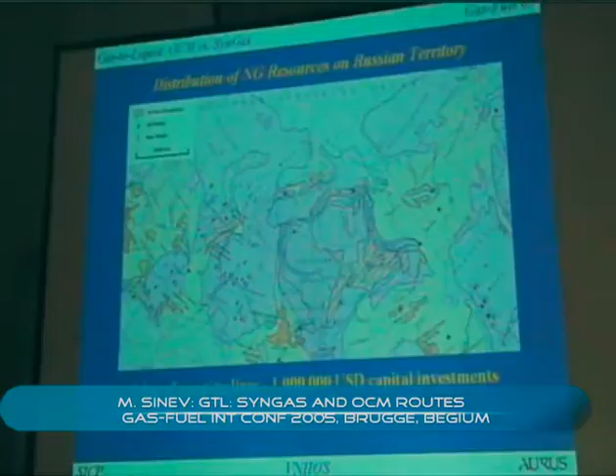These huge territories are gas and oil provinces in Russia. And this is the scale, this is 1,000 kilometers. Here you have a number: in order to build a pipeline of 1,000 kilometers, you have to pay about $1 billion US.

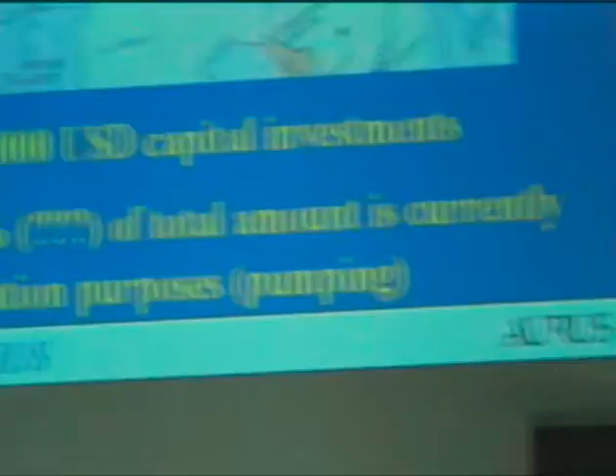It's quite a number. In order to collect gas from such huge territories, you have to build huge pipelines because you need a network. So that means there is one more problem: if we want to transport gas in pipelines, we are now paying about 10% of the whole amount of natural gas taken from the ground just to pump the rest. So this is really a very, very serious problem.

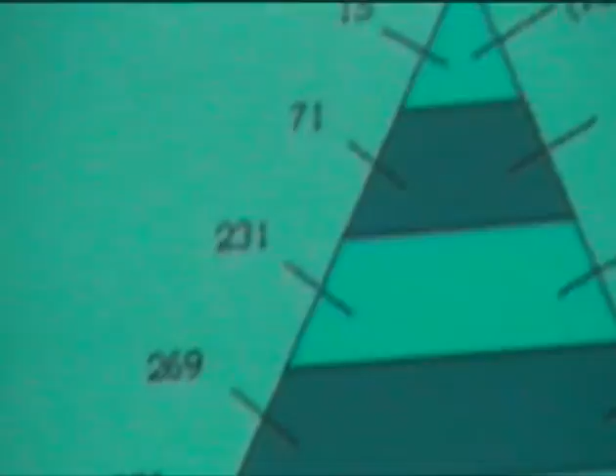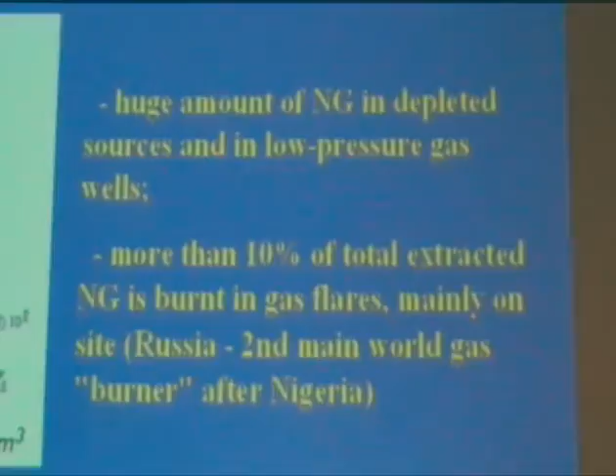There is another problem. If we look at the distribution of natural gas in different gas fields, we will see that only some gas fields contain enough gas to build huge GTL plants of the type we heard about during the last 2 days. But in other gas fields, the amount of gas is not as huge, and in order to build some plants or create technologies able to convert this natural gas into any product we would like, we have to think about different technologies.

But as far as Russia is concerned, we badly need new technologies which can work efficiently at a lower scale of operation.

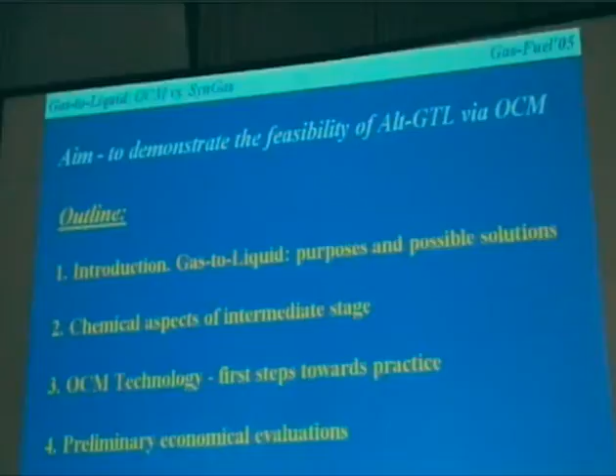The aim of this presentation is to demonstrate the feasibility of alternative GTL technology via oxidative coupling of methane. This is the outline of my talk. I will not stop in detail on the outline, and I will go to the content of the presentation.

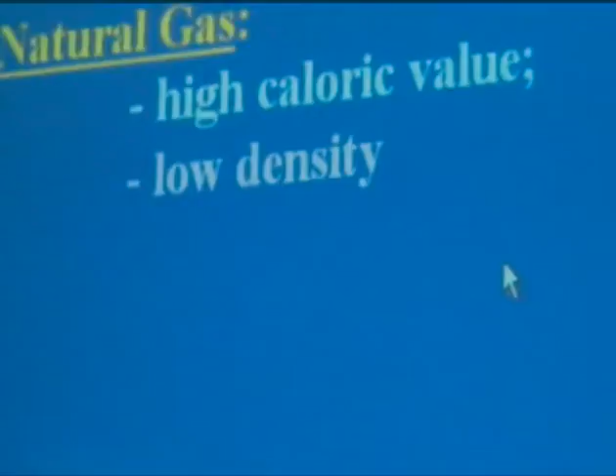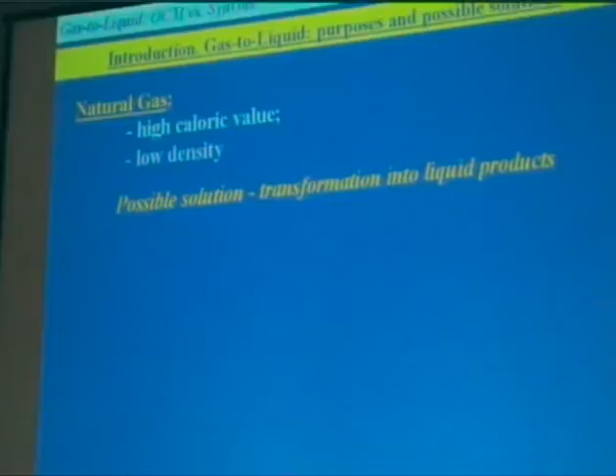Natural gas has high caloric value, but it has a low density. That means we need some ways to make the transportation of the high caloric capacity of natural gas to the final customer, to use it somewhere at a large distance from the place where we take the natural gas from the ground.

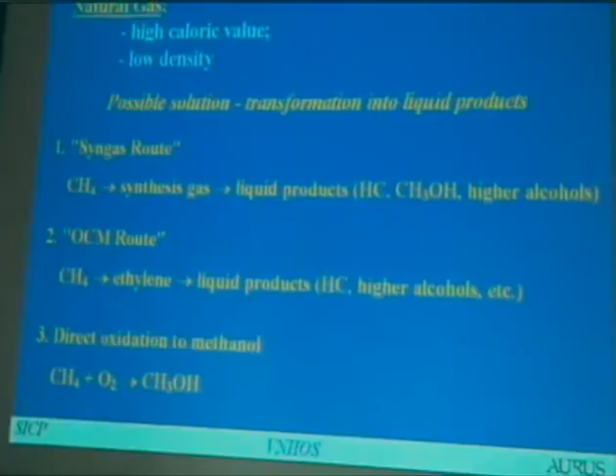Of course, the syngas route is one of the possibilities. Another one is the OCM route, which I will speak about in more detail later. And there is a third route, direct conversion of methane to methanol, which I will not speak about in detail because later this morning Professor Arutyunov from our institute will speak about it in more detail.

So I will focus more on the comparison of the two routes, namely the syngas route and the OCM route. Let me first speak a little about the chemistry of the process. Not just chemistry, but let's speak a little about thermodynamics.

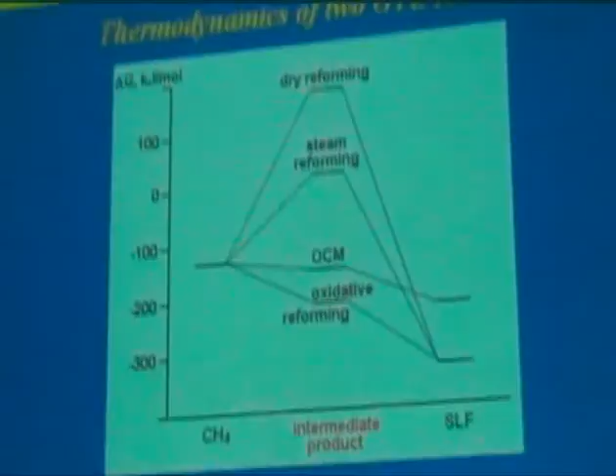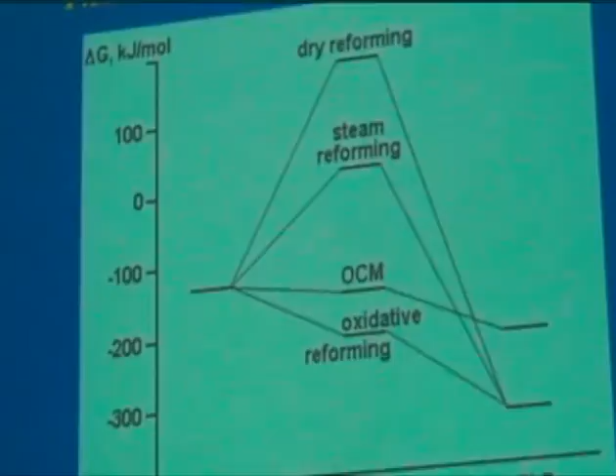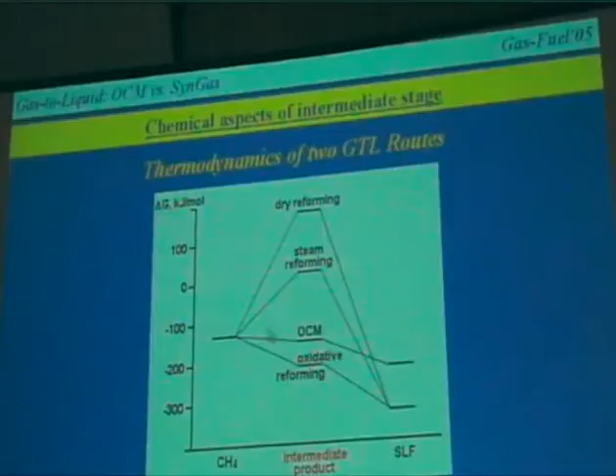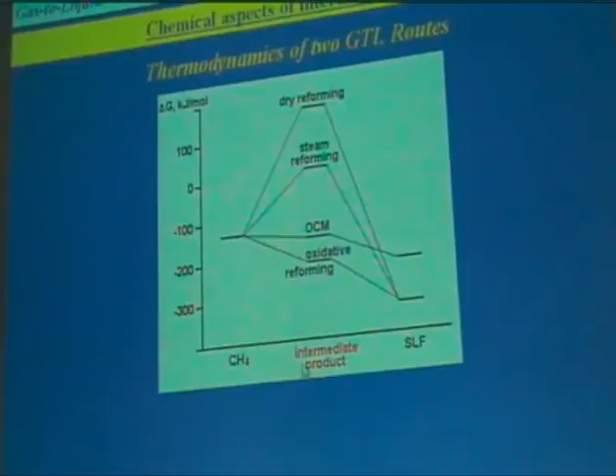If we look at the energetics of the transformation, the free energy of transformation of methane into the final products, in this case synthetic liquid fuels, we will see that if we use reforming with no oxygen, we will have to pass through a very high barrier. The first stage for the production of the intermediate product has a very strong uphill nature.

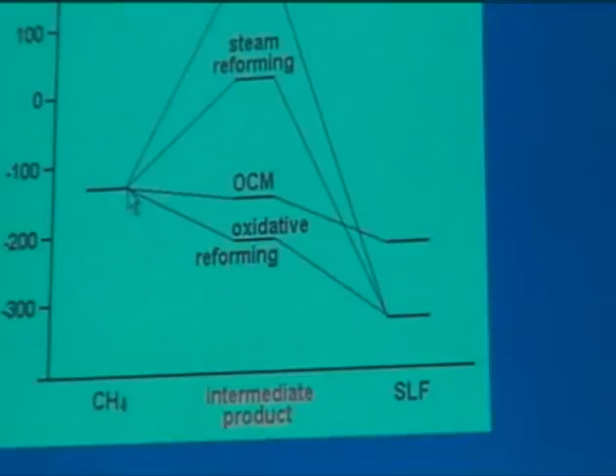But if we go to oxidative routes, for instance oxidative reforming, we go downhill. In the case of oxidative coupling, we have ethylene as an intermediate, and we also go downhill. And the final process, the second stage, is also a downhill process. So we can go smoothly from methane to the final product if we go oxidative.

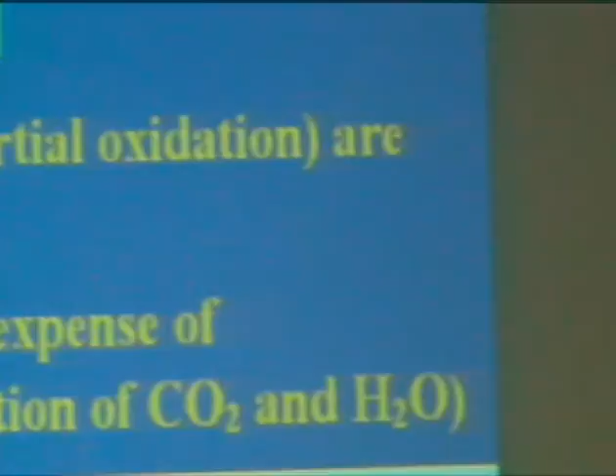So these are the messages from this picture. But also what is important in both cases: if we want to run our processes autothermally, we still have to burn a certain part of the initial natural gas, because neither in the case of oxidative coupling nor oxidative reforming can our catalyst work at the temperatures calculated as adiabatic temperatures in these two cases. So we still need to burn part of the initial natural gas to run these processes autothermally.

That means we will never be able to achieve 100% selectivity on a carbon basis in the case of OCM or oxidative reforming, in terms of carbon and hydrogen efficiency. A little bit about the history.

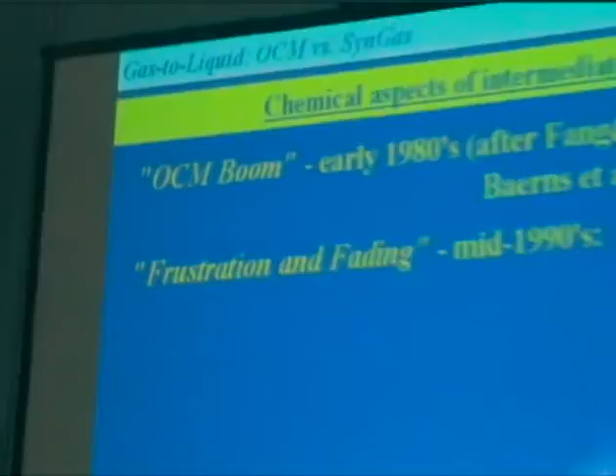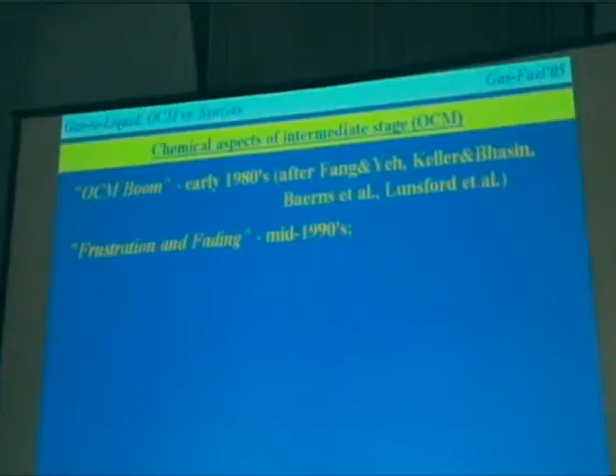Probably many people in this audience remember this oxidative coupling boom, which appeared in the early 80s after the pioneering works of people whose names are now on the screen. But after about 10 or 15 years of development of the area, it went to a state of frustration and fading. And there were certain reasons for that.

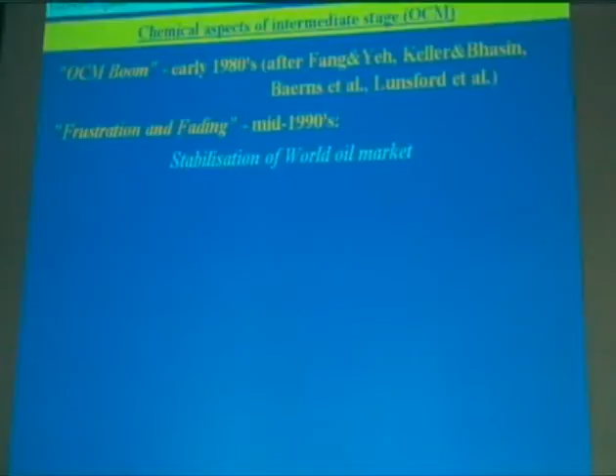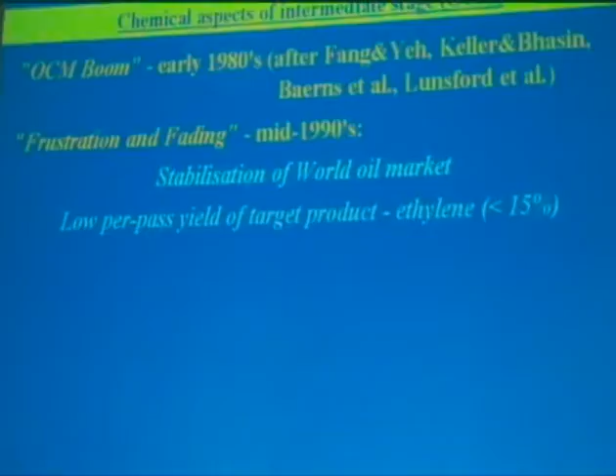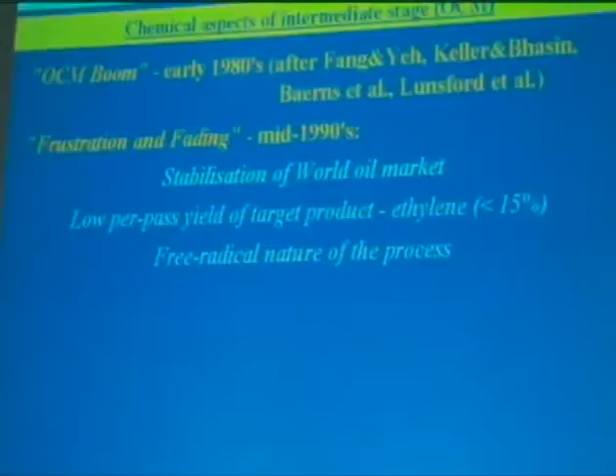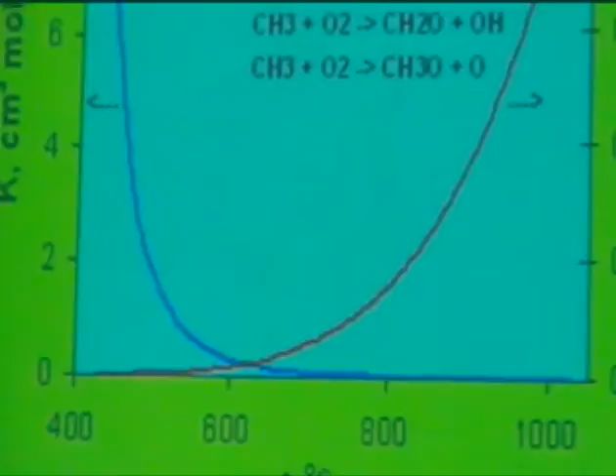First of all, I believe this was due to some stabilization of the world oil market, and relatively low per-pass yield in the oxidative coupling. We cannot achieve more than 15% ethylene per pass because of very strong kinetic limitations, and also because of the free radical nature of the process. Although it's a catalytic process, it has a free radical nature, and it's a very serious problem for scaling up and stable operation because of that free radical nature. But at the same time, it's namely this free radical nature that allows it to take place.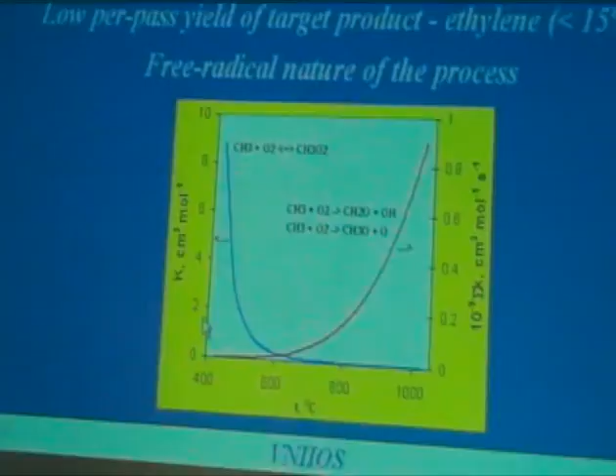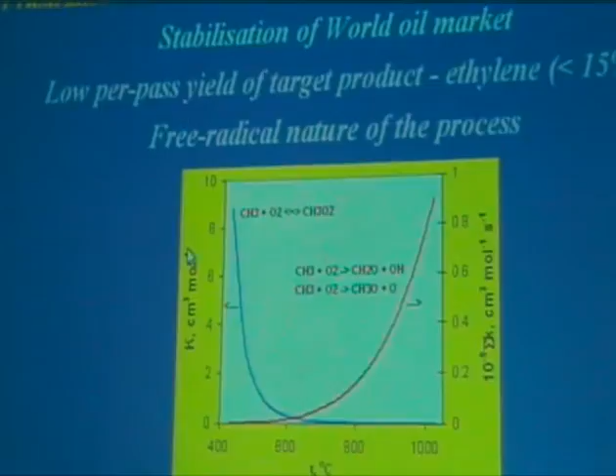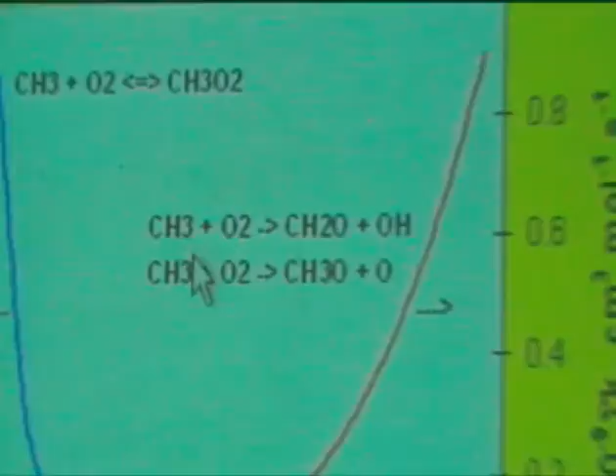If we speak about the microkinetics of the process, we have what I call the OCM window, in the range of temperatures between say 600 and 850. On the left-hand side we have a strong decrease in the value of the equilibrium constant of the methyl reaction with oxygen in the gas. On the other hand, in this temperature interval, the reactions of direct burning of methyl radicals are not important. So in this temperature range, this radical chemistry in the gas phase allows the OCM process to exist.

Now I go a little bit into more technological aspects of the problem. As I told you, there was a boom in oxidative coupling, and in many places in the world, in the United States, in Europe, in Japan, some pilot plants were built, as far as I know. Of course, this is not very open information, but it's known. Now we are trying to give a new life, I would say, to this technology.

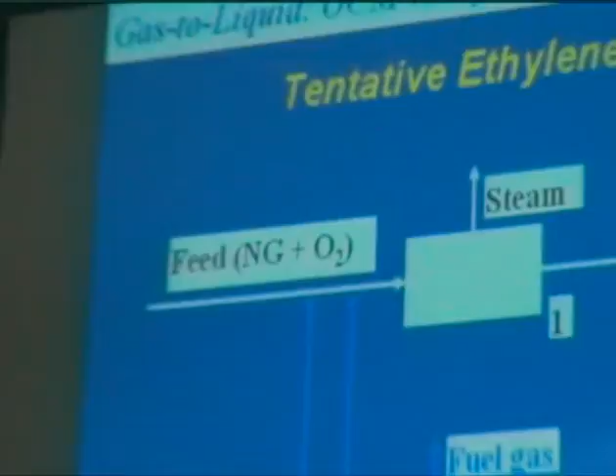On this chart you have an idea of how a tentative ethylene production scheme looks like. This upper part in white is the production of crude ethylene, but this bottom part is what allows us to separate the ethylene from the reaction mixture and bring it to the conditions at which we can use it as a source for polymerization.

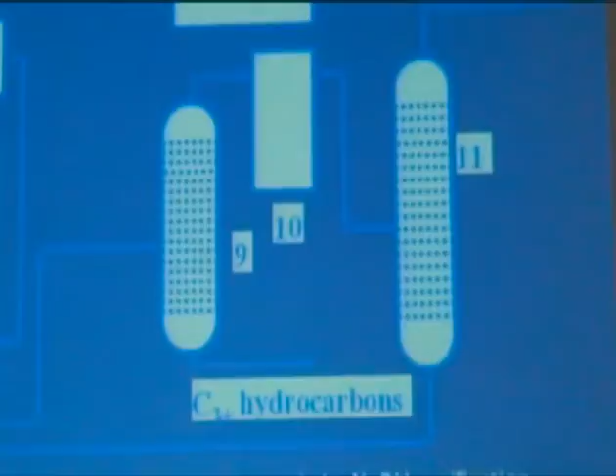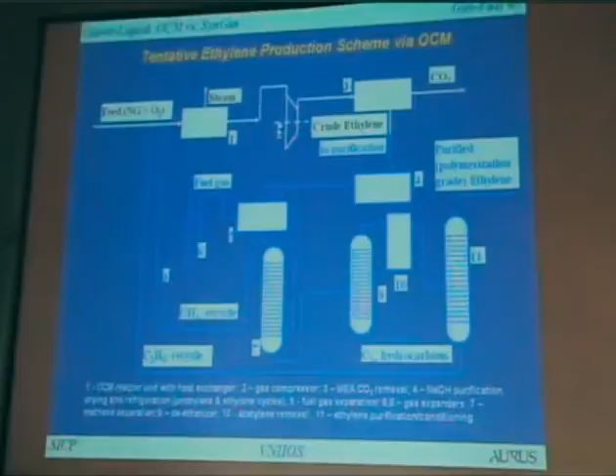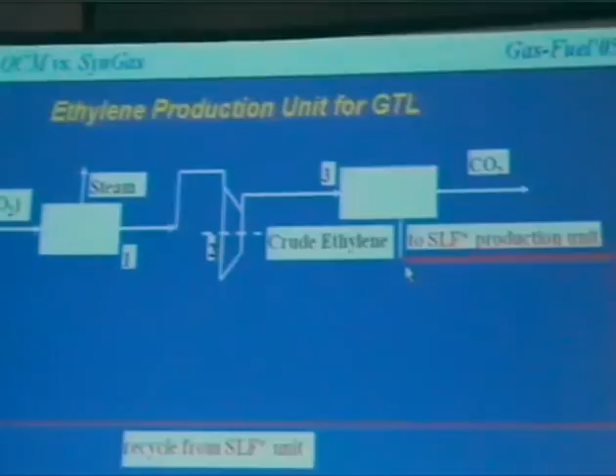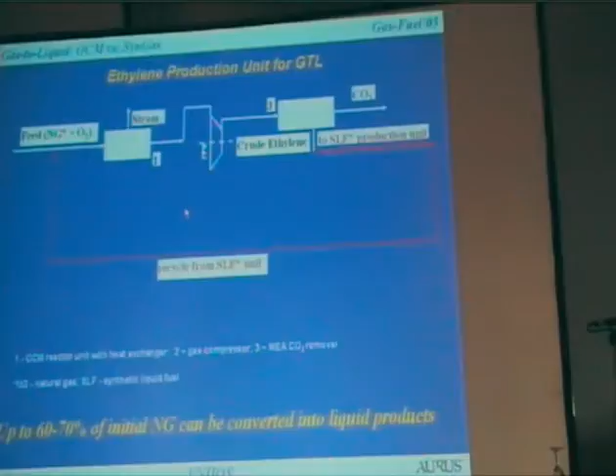Some estimates demonstrate that if we talk about the product for polymerization conditions, we have to pay about 80% of the primary cost for the bottom part of this picture. But if we go to synthetic liquid fuels, we can just forget about that part, and we can produce, in a way similar to the one we saw in the previous presentation, a synthetic fuel very similar to that one, and just recycle the rest of the light hydrocarbons back to the feed. In this case we can convert up to 70%, or at least 60%, of the natural gas coming in into final liquid products.

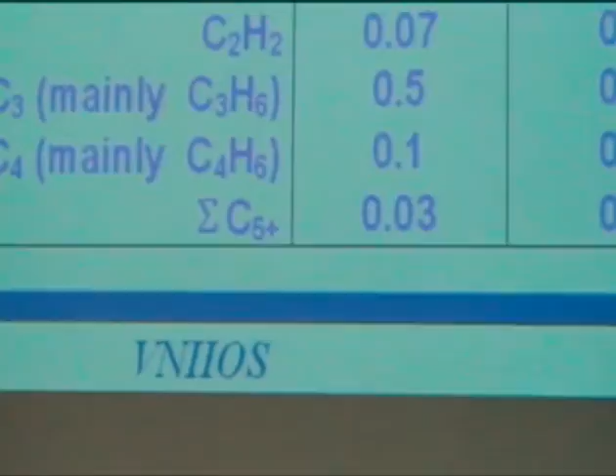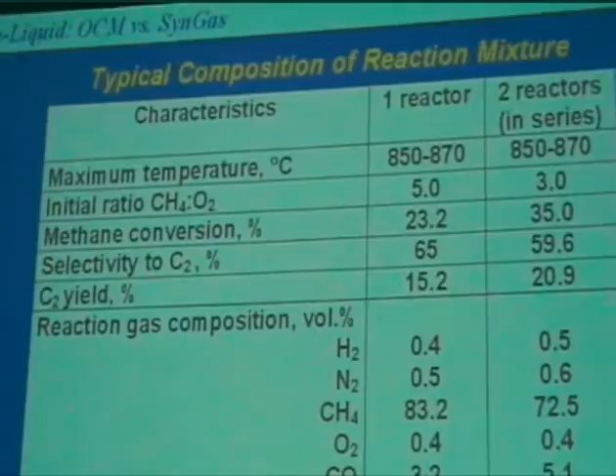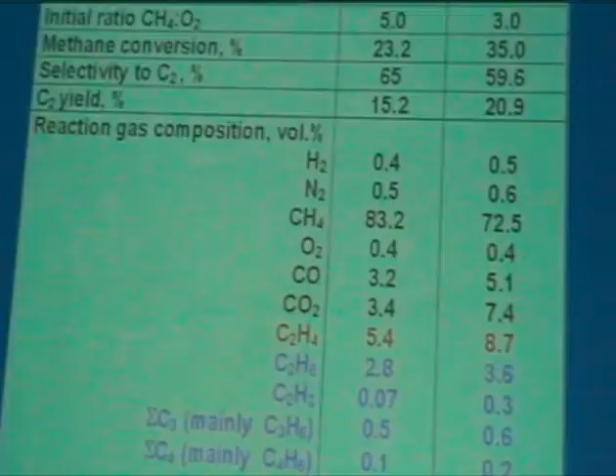This is a typical composition of the reaction mixture which we have in the case of one reactor, or two reactors put in series. We can run, of course, in one reactor with this ratio, but there are two issues. One is safety — of course we don't want to have explosive mixtures in the reactor. The other, which I mentioned before, is that we want to run the reactor autothermally. So if we have a lot of oxygen going into the first reactor, we get overheating, and the process becomes not sustainable and can run away. So we have to reduce the amount of oxygen supplied to the first reactor.

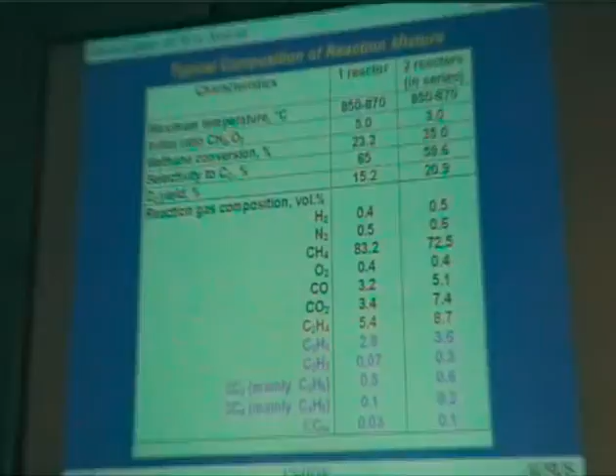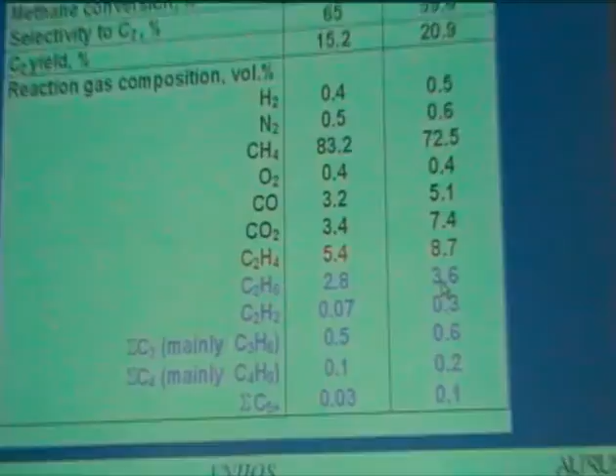But what we don't need to do is separate the mixture after the first reactor. So we can run them in series with no separation of the reaction mixture. We can have up to 8 or even more percent ethylene at the outlet of the reactor, and we have a certain amount of C3 and higher hydrocarbons which can also be utilized.

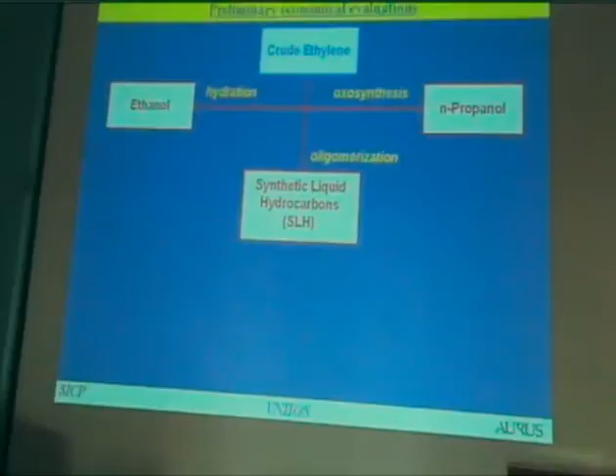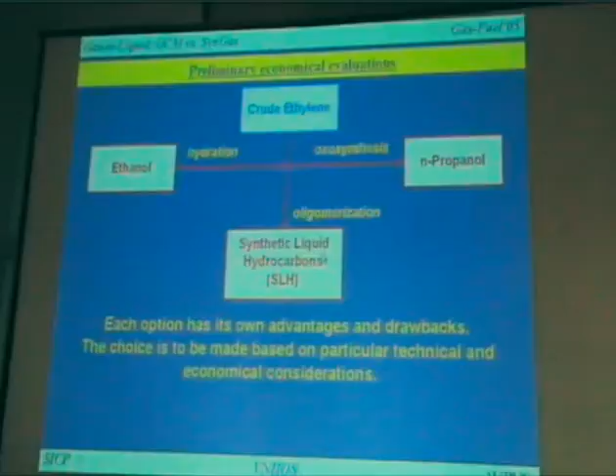Just a few words about economics. There are several ways to transform crude ethylene into liquid products: hydration to produce ethanol, oxosynthesis to produce some chemicals which have more carbon atoms in the molecule than ethylene does, and also oligomerization to produce synthetic liquid hydrocarbons. The next economical speculations I will deal with concern this oligomerization.

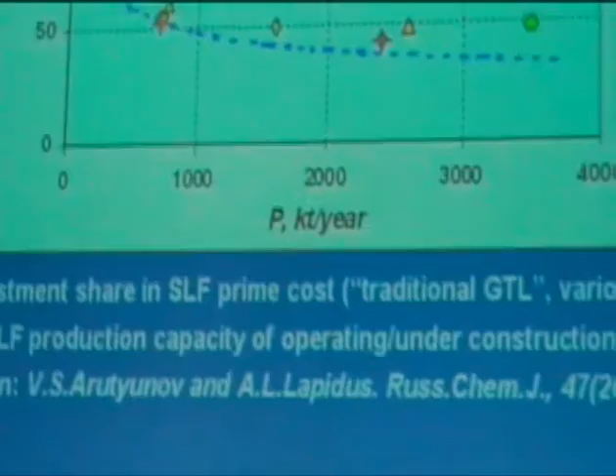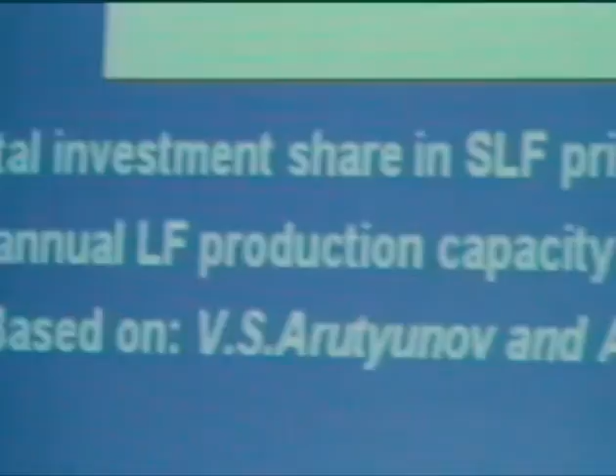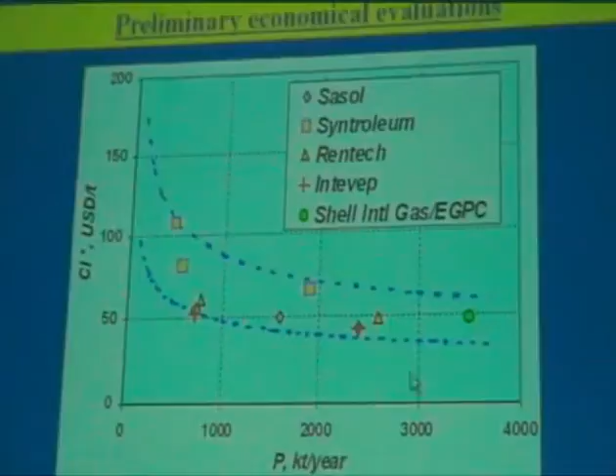Here is a typical trend of the cost we have to pay for capital investments if we want to build huge GTL plants. It's very well known, and we heard about that yesterday, that the bigger the size, the less we have to pay for the unit production.

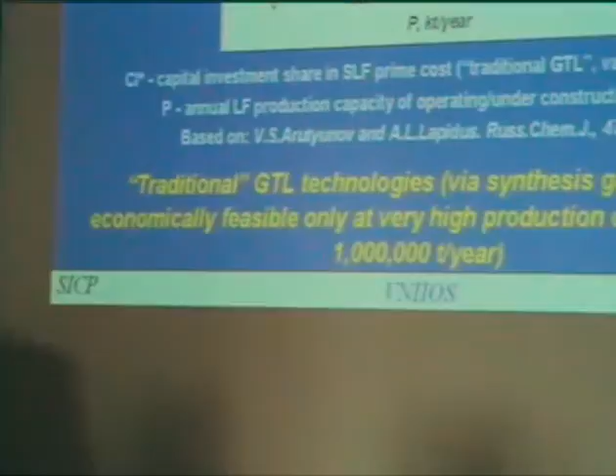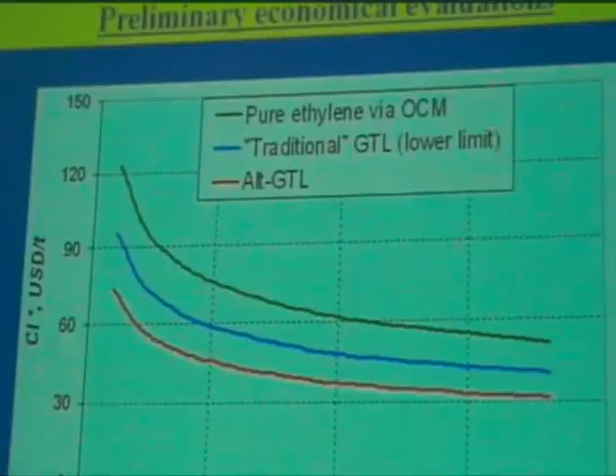As I told, traditional GTL technologies require a very big amount of natural gas concentrated in one place, but we want to build something much smaller. Our preliminary economical evaluations demonstrate that if we want to build a plant for production of ethylene for polymerization, we have to pay more than for regular traditional GTL.

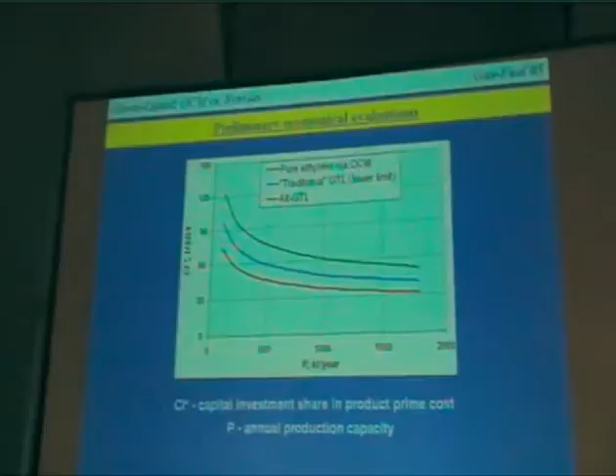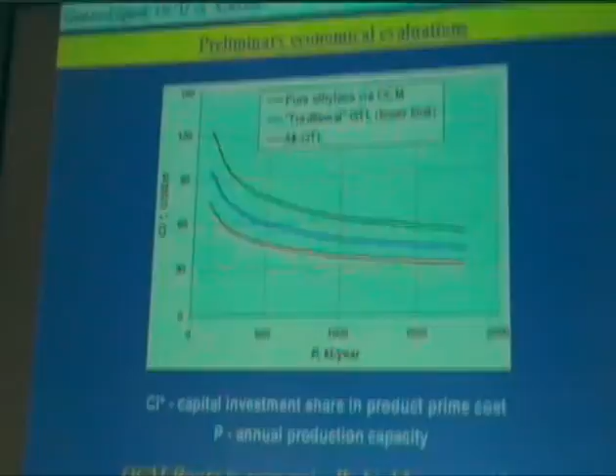But if we transform ethylene without preliminary separation and purification into liquid hydrocarbons, the economical efficiency could be at least slightly higher. This means that the OCM route can be highly economically competitive.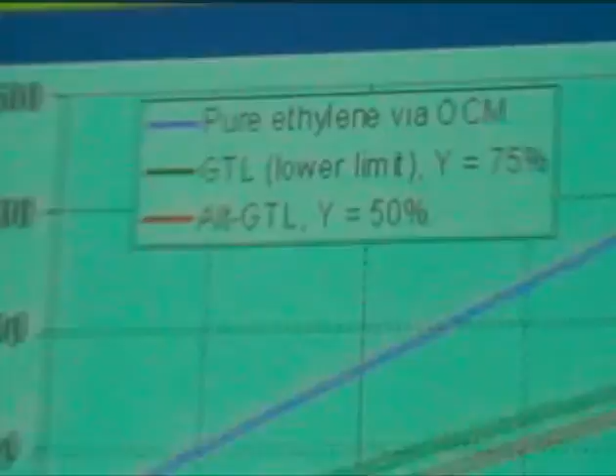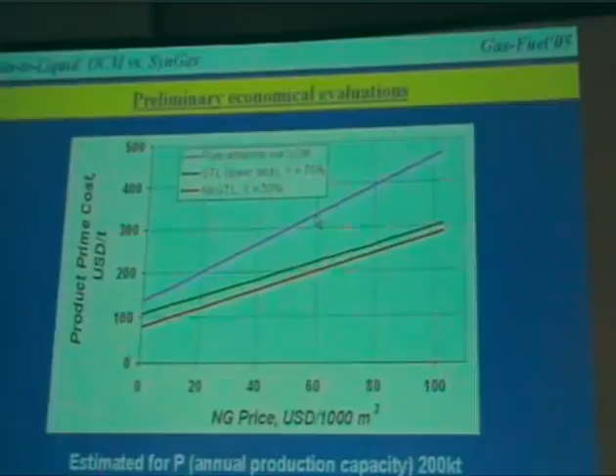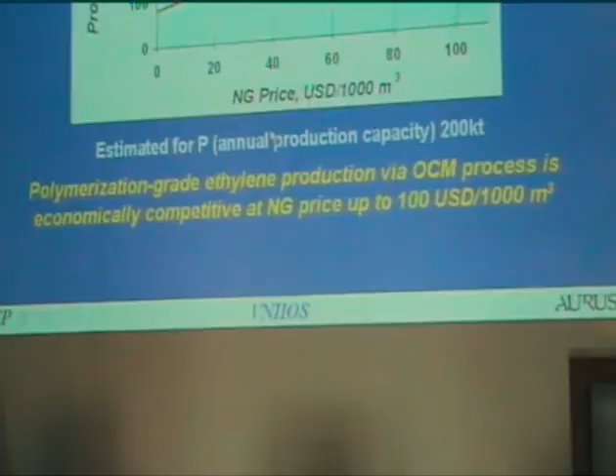These are the graphs which show you what can be the product prime cost. Again, we see that if we want to produce pure ethylene, it goes higher than traditional GTL and alternative GTL via the OCM route. But still, even with a relatively high natural gas price, the production of pure ethylene via oxidative coupling can be economical.

In some places in the world, especially in Russia, the price of natural gas is almost negative. That means we just have to pay some money to flare natural gas, and we have certain very serious environmental problems. So the price of natural gas in some locations is just negative.

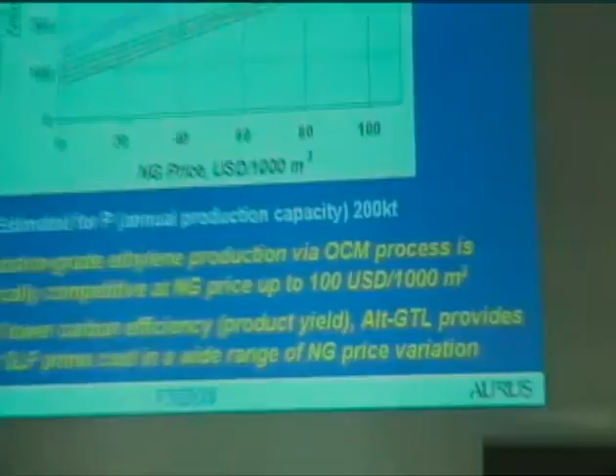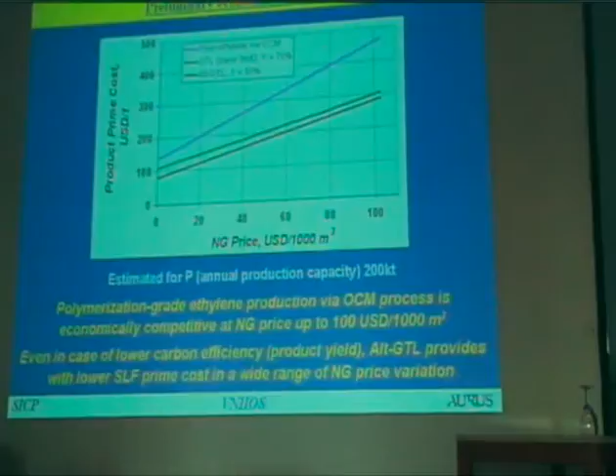Even if the carbon efficiency, in terms of single pass yield and overall yield of the final product, is not 100%, this alternative way of production of liquid products from natural gas can still be very feasible, especially in certain locations. Now I go to conclusions.

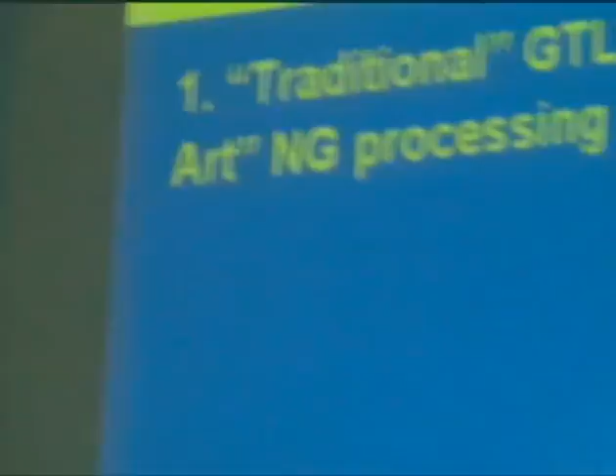The material I presented here is known from the presentations we had yesterday and probably will have today as well: traditional GTL technologies represent the current state of the art in natural gas processing. But they require very high initial capital investments which are not accessible in many cases.

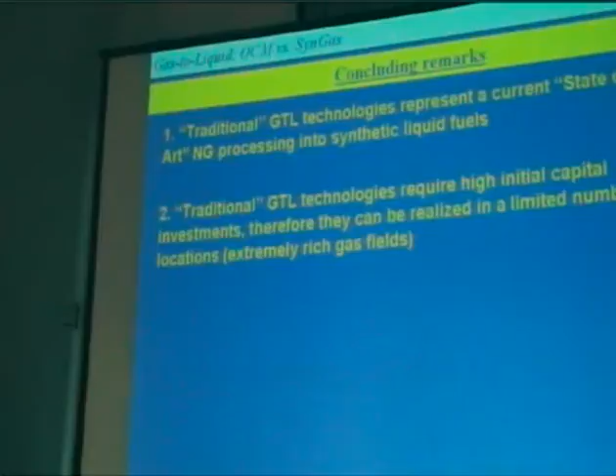The number of cases when these high capital initial investments are not accessible is much higher than the number of cases where they are accessible. The alternative GTL technologies require lower initial capital investments and can be efficient and economically feasible at a smaller scale of production.

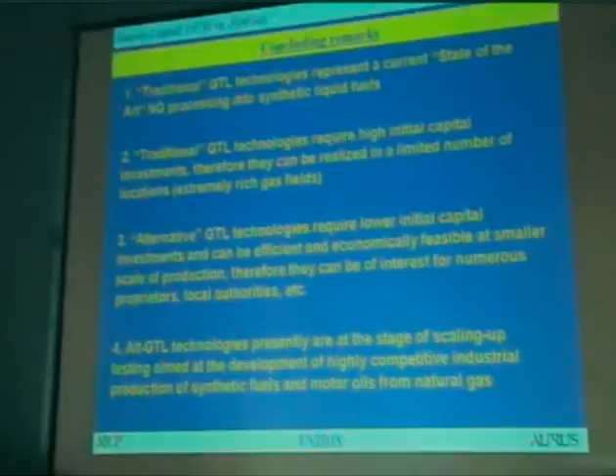These technologies are presently at the stage of scaling up testing, and now we are trying to achieve the yields which are available in the laboratory at a little bit higher scale of operation, because the intrinsic activity and productivity of the catalysts we have is sufficiently high, but the scaling up is a big problem in this case. My final remark: I thank all of you for your kind attention.